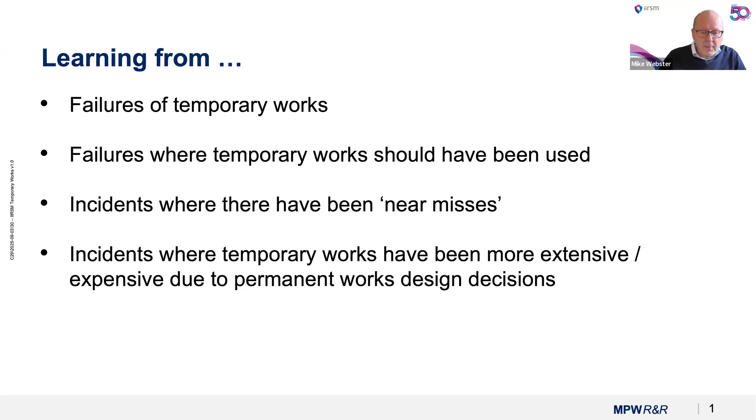One thing to note up front is it's quite difficult to find detailed information in the public domain on these sorts of incidents, so I've had to use information from a range of countries over and above the UK. In cases where I've been involved as an expert, I'm limited to speaking about what details are in the public domain, so the information put up might not be as extensive as we'd like it to be.

Before going into some of the case studies, I thought this was useful to look at - this was from the Bragg report, a report from 50 years ago into falsework collapses that led to BS 5975. One of their conclusions was: each failure has 2 elements - the technical cause which led to the collapse, and the procedural errors which allowed the faults to occur and go untested and uncorrected. You'll see these coming through each of the case studies as we go through them.

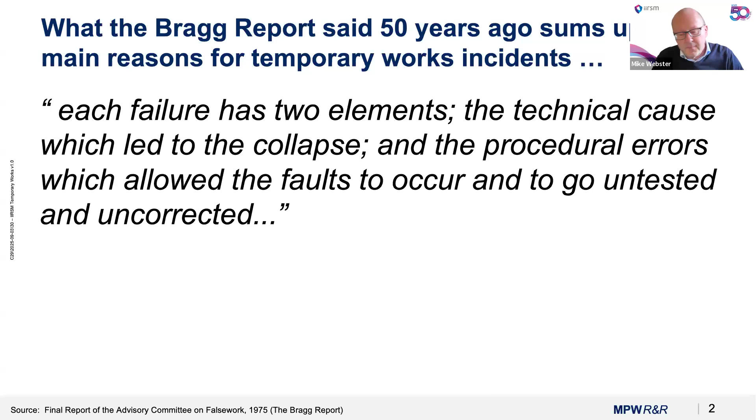I'll talk about 3 case studies of failures of temporary works, and then I'll stop at the end of this section in case there's any questions from yourselves. So the first one was...

A 40-meter high scaffold in Milton Keynes that collapsed in April 2006, leading to injuries to 3 workers. Unfortunately, it wasn't a designed scaffold - it was based on a standard scaffold and erected to a height and width much greater than you'd expect for a standard scaffold, a sort of TG20 type scaffold.

Sorry Mike, can I just interrupt? Sorry Mike, because I'm just not seeing your slides at the moment. Oh, that's not showing - I know we had them open just before we opened. I can see them. Oh, not coming up for me at all. Oh, Joe can see them as well. Brilliant, it is literally just my Zoom playing up. I am ever so sorry everybody else, I'll be quiet again and see what's wrong with my Zoom. Better to think you've got a problem and not have one than to think you haven't and you have. Yes, the wonders of modern technology.

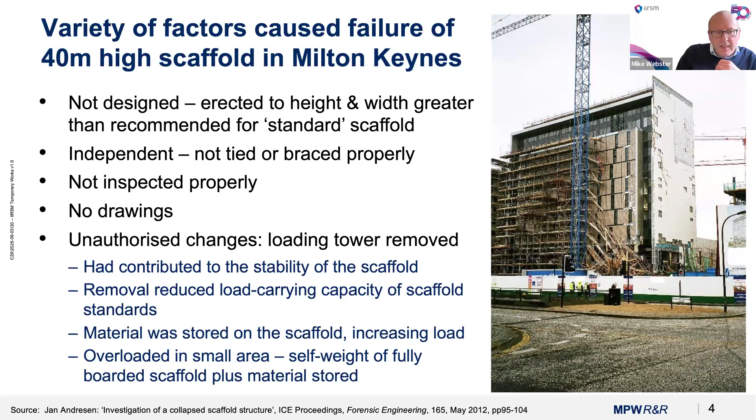So it's a combination of control, unauthorized changes, not following what BS 5975 would require.

The second one to talk about today is a collapse of scaffold supports in a concrete building in Rotterdam in 2010. This was a hybrid precast and in situ concrete construction. The main beams were in situ concrete, but they had precast slabs spanning into them. Before the main in situ beams were completed in place, they had to support temporarily the precast slabs. You can see some of the support to the bottom of the photo on the right here.

What happened during the casting of the floor, the temporary propping structure collapsed, resulting in 5 injuries. The detailed investigation that the Dutch authorities did indicated there was no stability calculations, and the bracing had been omitted in one direction. Although that had been noticed, there was no clarity on responsibility, so it meant that although someone had seen it, they didn't bring it up, they didn't take any action.

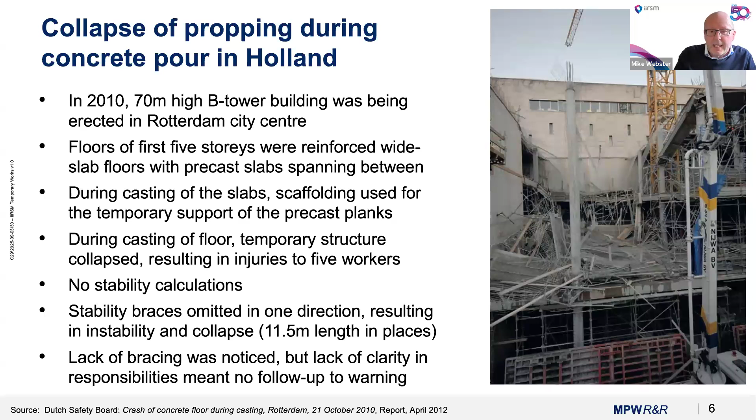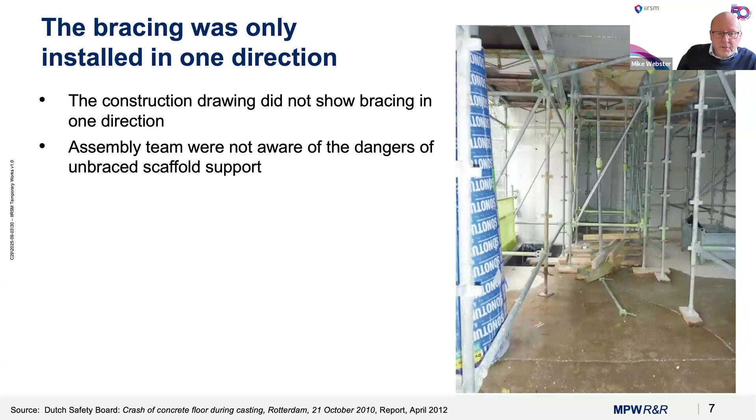There's just a couple of photos that are in the investigation report. You can see here in the longitudinal direction going into the page, there's actually no bracing between the vertical members, whereas you can see some bracing in the lateral direction. From the report, it turns out that the people who assembled it weren't aware of the dangers of unbraced scaffolding. And here you can see that the vertical members were footed outside the slab.

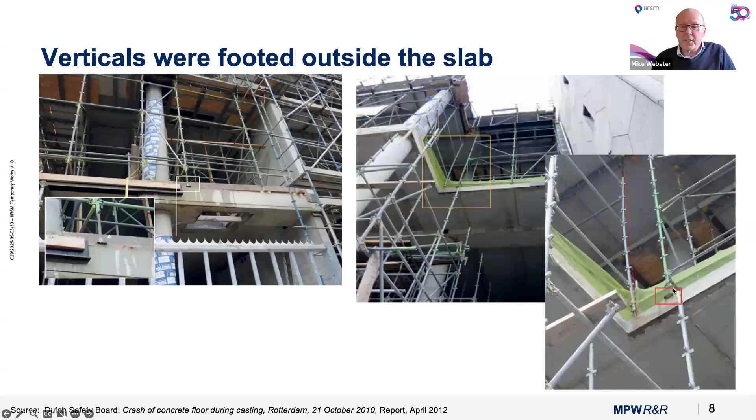This meant an awful lot of the load was taken in the vertical members rather than going through the slab. You can see on the right hand drawing here, bowing of the vertical members under the load. And here we've got an offset junction that would have taken an awful lot of bending and shear stress from the level below that you wouldn't expect a connection like this to have to take.

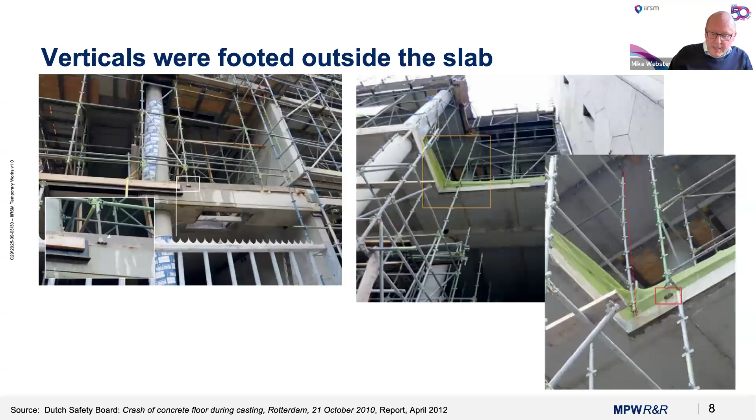So again, a combination of the design left out elements. It wasn't appreciated on site. It was spotted by some on site who didn't flag up the issue.

Again, it was a combination of multiple design and construction errors. I've got a few more slides showing detailed photos of what went wrong, but in summary, the design had used the wrong method for undrained soils in the finite element analysis, which ended up overestimating the soil strength, underestimating the loads, giving an under-designed diaphragm wall.

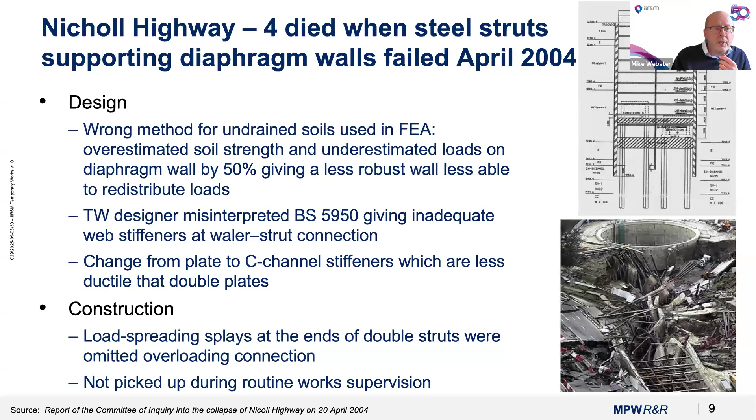The stiffeners were inadequate because the temporary works designer had misinterpreted BS 5950 for steelwork. There'd been some previous buckling of stiffeners, so they changed to a C-channel section, which is less ductile, gives less warning of failure. And then in construction, load spreading splays were left out, and it wasn't picked up during routine supervision inspection. Got a few more details here.

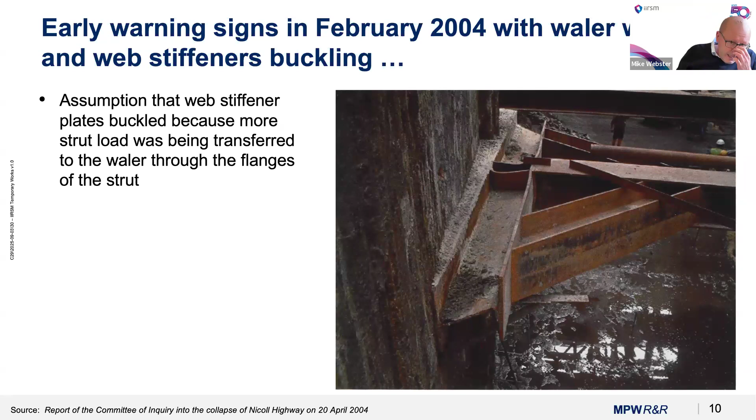This slide shows what was happening 2 months before the collapse. You can see at the end where this member comes in, the longitudinal strut comes into the waler. Because there's a heavy concentration of load there, they've put 2 stiffeners there to stiffen the web. These would seem to be buckling, and the assumption was that more load was being taken into the waler than anticipated.

So the reaction to that was to replace those vertical stiffeners shown in the previous slide with C-shaped channels, shown in yellow on this slide. The trouble is no one had experience of using them as stiffeners. It seemed like a good idea, but they didn't have the experience and didn't appreciate that although the capacity increased marginally, the ductility, that warning of failure, was reduced considerably, because there tends to be more of an element of sway failure whereby the channels would move sideways.

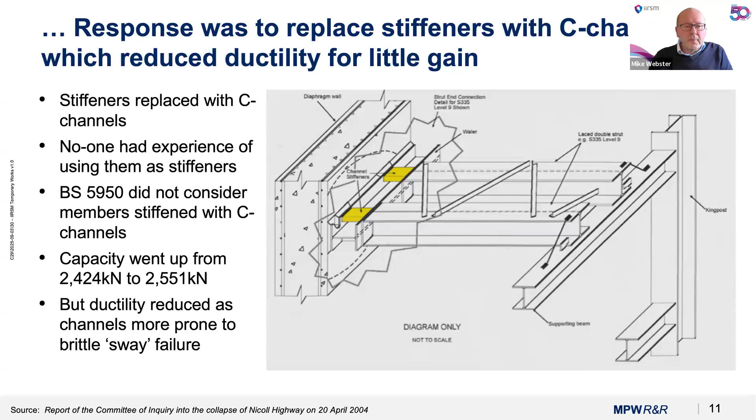And the other problem was the connection of the waler with the C channel, and the designers had got the bearing length wrong and the effective length of the web.

What should happen is if you've got the web taking a lot of load, you want it at an effective length as low as possible so that it's stiffer. And what we should have had is a 65mm assumed width rather than a 400 assumed width.

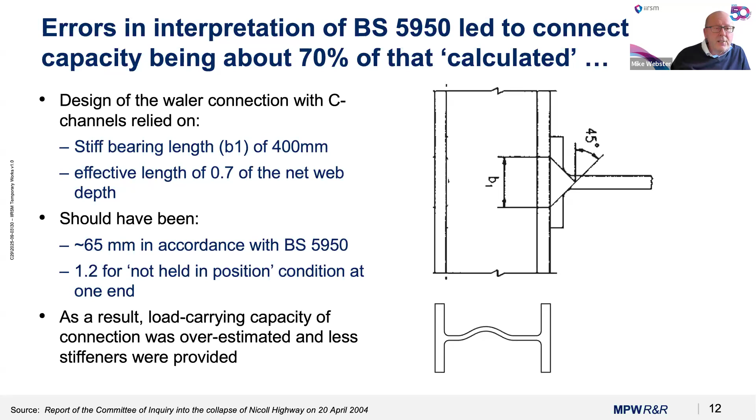And the web shown in the bottom here as sort of curved should have been taken as 1.2 times the length instead of 0.7. And the result of this, for those familiar with steelwork calculation, is that it overestimated the load carrying capacity of the connection, and fewer stiffeners were provided than actually needed.

And then when it came to the site work, not only had we got the design problems here, but there was an intention to put in these splays, the diagonals at 45 degrees shown in the top diagram here. And they would have taken some of the load from these struts, put it into the waler.

Without these splays there, the loads were going straight down the struts here into the C sections here, which you can see have swayed over a bit, and then into the waler. So it meant the connections were carrying 100% of the strut load instead of 2/3.

There was no redundancy anywhere else for the load to go, which meant that when a strut fails, the neighbour is unable to take the load. And because, going back to the first slide, we've got an understrength diaphragm wall, which was unable to distribute the load, then that's when the failure occurred.

So a combination of design and construction issues that weren't properly spotted, either in design checking or in the construction.

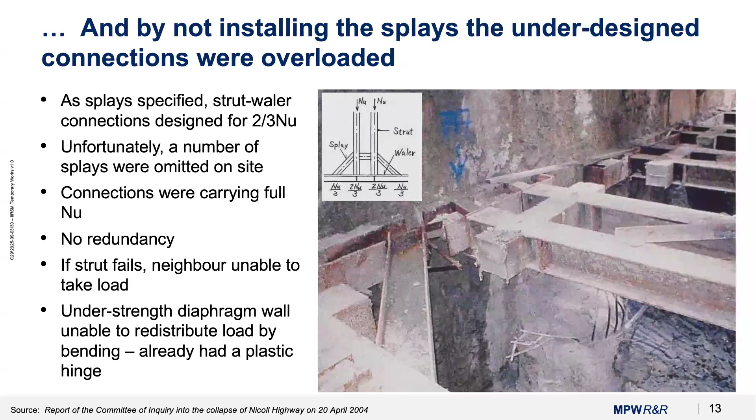So it's all going to come to the fore. I've got to do what's called knowledge, skills, and behaviours for designers. So those are perfect examples that Mike's going through here. Fabulous, thank you very much for that, and a few more to come that hopefully will give you some case studies.

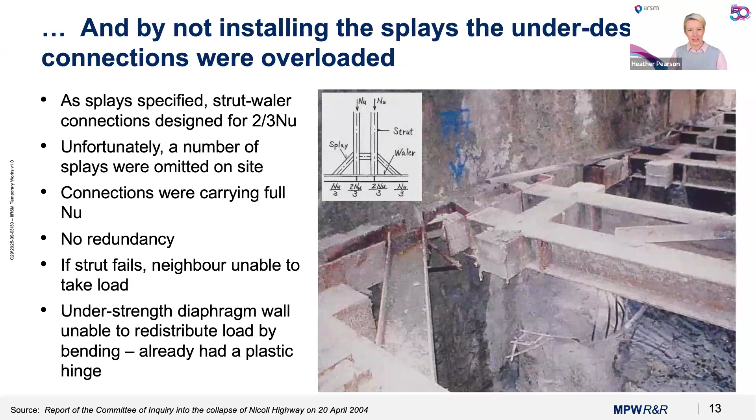Spot on. I've just got one more comment from Ahmed, who says the integrity of the construction drawing engineer and the temporary works coordinator is also quite important. Okay, thank you for that, Ahmed. Okay, I will let you continue. Thank you very much, Mike.

Right, thanks. And this next set of three case studies is something that I perhaps see a bit too frequently - failures where temporary works should have been used. The first one, relatively straightforward.

It's a trench 2.4 meters deep. It should be relatively obvious that we need to support a trench of that depth, because one of the big problems is, yes, soil can stand up on its own when it's excavated, but we don't know whether it's going to stand up for 30 minutes, 30 hours, 30 days or not.

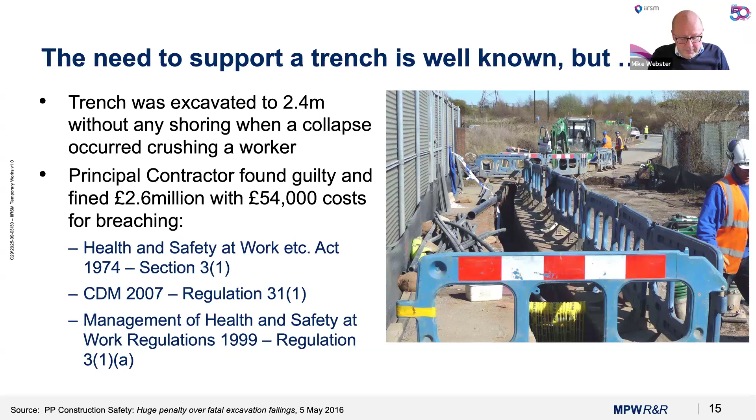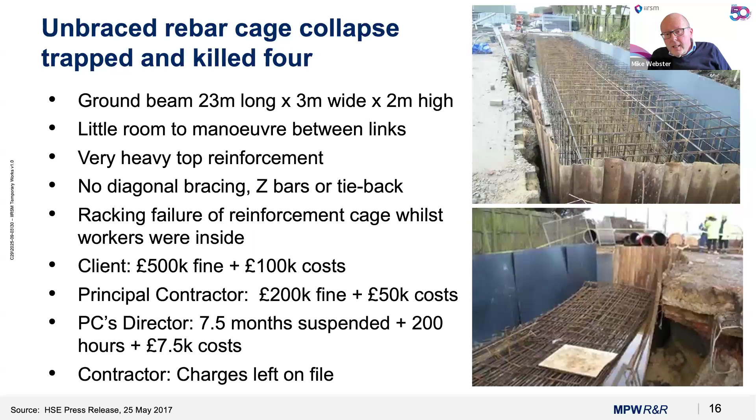Not only was the principal contractor fined 200,000, the client was fined as well. The principal contractor's director had a 7.5 month suspended jail sentence plus community service and costs. For the contractor, the charges were left on file because unfortunately it was their people, a couple of their directors, who had died, so there was no one really to be charged. The only organisation not prosecuted was the designer.

3 frames were left propped against the column overnight. Those 3 frames weighed 655 kilograms overall, and everyone just thought they'd been strapped to a column. Turns out they hadn't, and unfortunately they ended up falling on a passerby, killing her outright.

The contractor was fined for it, the contractor supervisor had a 12 month jail sentence, and the principal contractor site manager got a 6 month suspended sentence. So just as a reminder, even what we might view as a fairly minor temporary condition - make sure things are restrained or strapped properly. It doesn't actually need much force to stop things like these falling, but equally it doesn't need much force to start them falling. So just a reminder about simple situations.

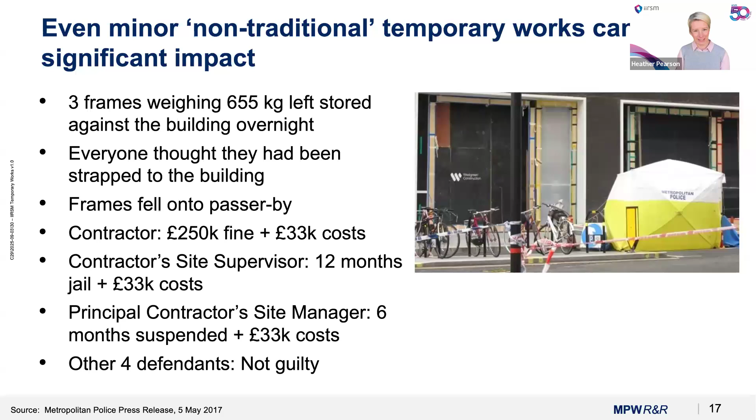We then review them and put comments, and it's put on the CROSS website for people to look at the reports, also sent out in quarterly newsletters. Where it's quite useful is if you've got a particular situation you've not come across before, or you're doing risk assessment or planning - it's often worth clicking on the site, having a look, putting in your keywords, and you'll see other people's near misses and the comments we've put on them. It's quite useful to learn from other people's near misses and get the information into your planning. Equally, if you see something that's a near miss, submit it to CROSS - it's all confidential and will all be anonymised.

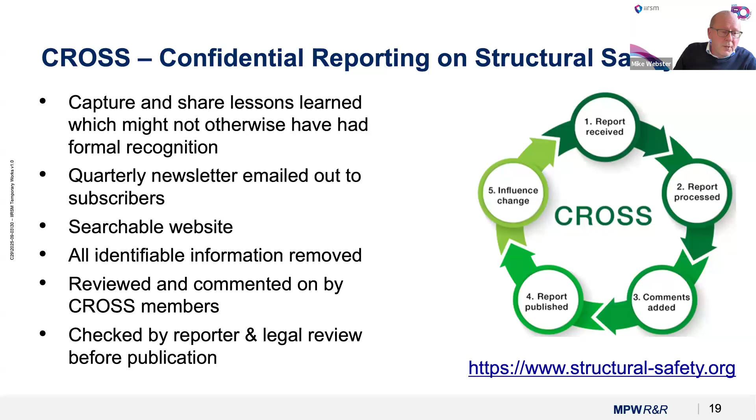So there was always going to be an element of wind tunneling and wind force on that wall. The permanent works designer did identify the need for propping in a risk assessment that they did, but it seems it wasn't set out clearly enough for the contractor to spot, although really the contractor should have questioned it, given a wall of that height with the potential for wind.

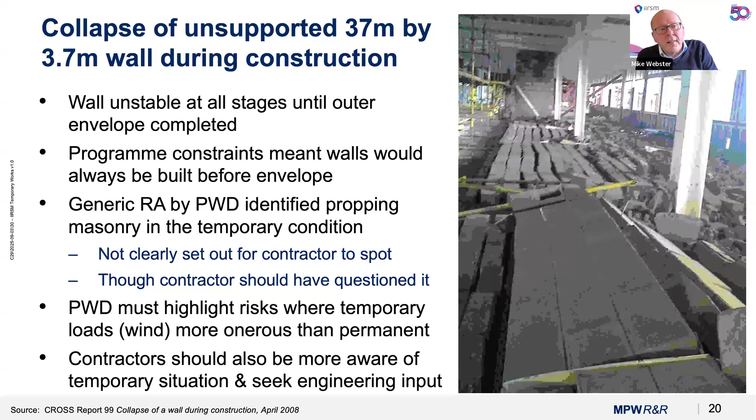But it highlights a couple of points that tie in with BS 5975. The permanent works designer needs to highlight risks where temporary loads are going to be more onerous than permanent ones - in this case, the temporary wind load when the wall is exposed. And contractors should also be a bit more aware of the temporary situation and just seek engineering input, or ask the designer if they've got concerns.

But in the intermediate stage, you need to give some thought as to how those forces can be resisted. With this, because it was largely a steel structure, but the second floor was post-tensioned in order to give longer spans, the contractor decided to erect the steel first, with the post-tensioned second floor being done later.

The steelworks subcontractor appreciated the issues here and put in temporary bracing to the kinked columns. The main contractor then, for some reason, removed that bracing, presumably in their way, and was a bit surprised when told the bracing was still required and it needed to be put in to stop any potential temporary instability.

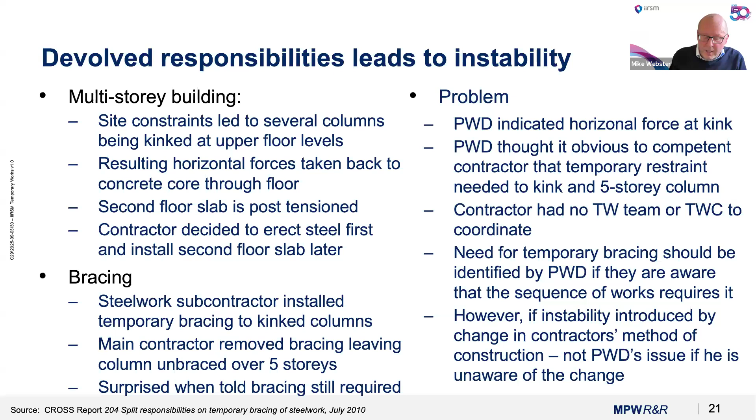But again, if people are not familiar with it, there's just the temptation to think we just need to take the loads off the walls.

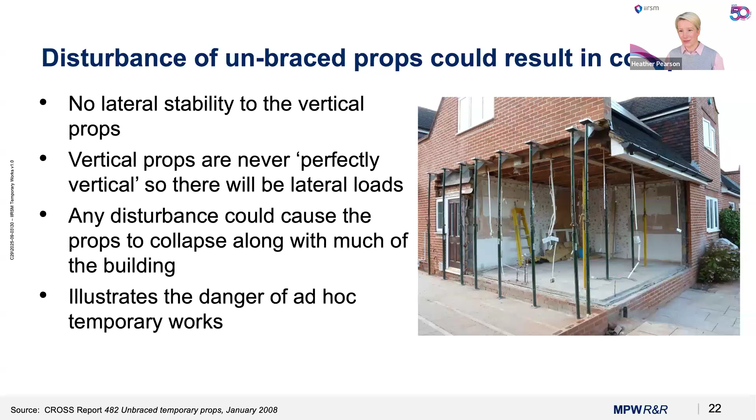That's quite interesting, putting that cost element in there as well, that 40%. Okay, I don't have any more questions coming through in the chat at this moment, so I'll hand back over to yourself.

The final category is incidents where temporary works have been more extensive or expensive due to permanent works designers, which follows on neatly from Heather's question. The first one is a fairly impressive scaffolding structure, a standalone, independent one. But the reason it's standalone is because no ties were permitted in the building due to the render used, the difficulties of patching, and no opportunities for through ties as there weren't windows. So we've got this fully buttressed, freestanding scaffold.

One of the things I always point out is that the time taken to erect scaffolding actually exposes a lot of the scaffolders to risk of falls in particular. This took 4 operatives 7 days to erect, and presumably something similar to take down. I'm not sure how much it cost, but it feels a bit unnecessary, purely because decisions taken in the permanent works design meant the scaffold couldn't be tied into the building, so we needed this buttressed freestanding scaffold.

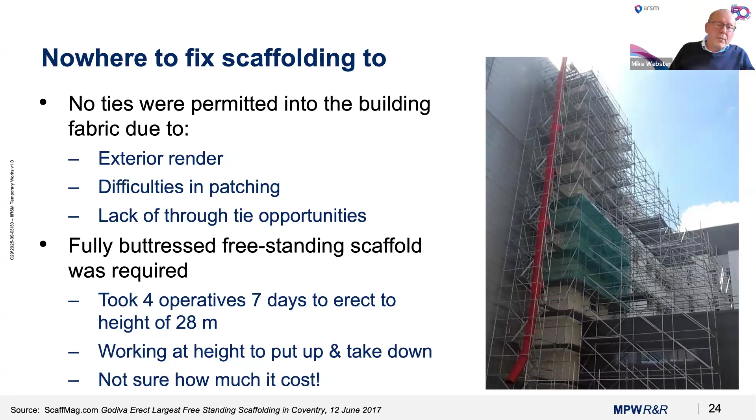Another one to be wary of is integral bridges. They're a good idea because they get rid of bearings and movement joints at piers where the bridge is all built. But a bit like the Dutch structure I showed earlier, what you've got is precast beams spanning between in situ concrete diaphragms at the two ends, with the precast beams spanning in between.

So the precast beams need to be supported until the concrete in the diaphragms at either end has reached sufficient strength, and effectively any temporary works would need to take the weight of the bridge beams. One key thing here is that because the foundations stretch out far enough, you've actually got a decent foundation to put the temporary supports in. You can see behind here the props holding the precast beams in place, taking the load down into the reinforced concrete foundations underneath.

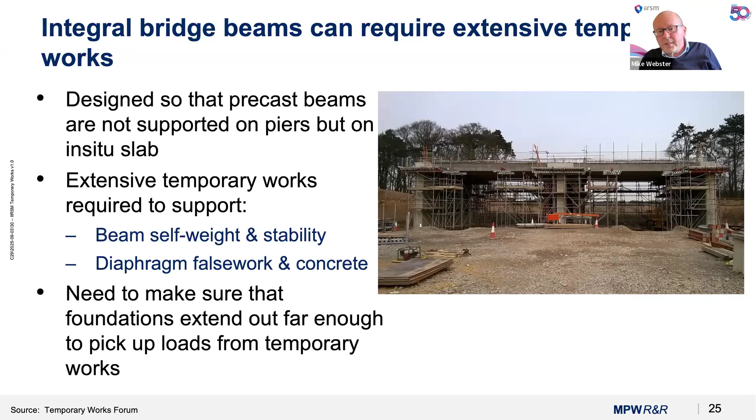If those foundations hadn't extended out a reasonable distance, you would have ended up with almost temporary foundations for the temporary works. So it's just a simple thought in the permanent works design - think about how it's going to be built. Yes, it might take a bit more concrete with slightly larger foundations, but it will save a huge amount of temporary works on site and make it safer to build.

The final example is an office block structure, where a crawler crane had to be used on the ground floor slab in order to install fairly hefty structural steelwork. Unfortunately, the permanent works designers hadn't considered the construction load case in their design - they only looked at the permanent cases. Of course, having a crawler crane tracking on the ground floor slab is a far more substantial load than any of the permanent loads.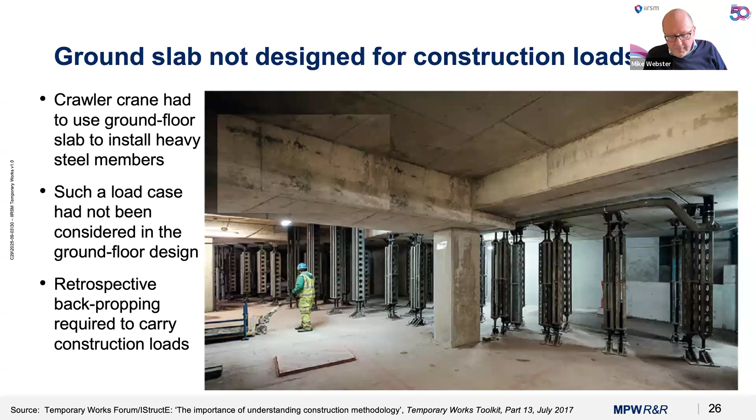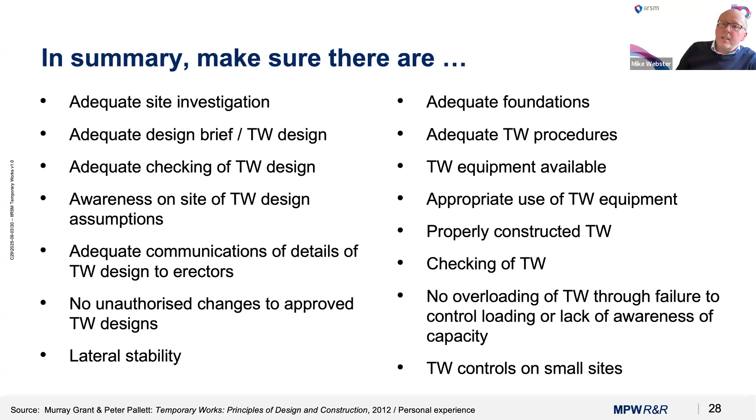One of the most important points is the one at the end about temporary work controls on small sites. We tend to think of temporary works as a full BS 5975 implementation with procedures and temporary works coordinators, supervisors, designers. But actually, HSE has produced what's called a sector information minute on its website that suggests for smaller sites there is a more proportional solution. It doesn't necessarily expect the full-blown BS 5975 implementation, but you need to follow the principles of having a checked design, having hold points in there, having checks.

And then just to end on a positive note, tying in with one of the questions that came up early on about BS 5975, some thoughts from fairly senior people in the temporary works industry: the impact of BS 5975, influenced as it was by the Bragg report, has been profound. Since its adoption by the industry, there's been no falsework or excavation failures in the UK on the scale of the failures of the early 1960s and 70s.

And tying in with what I've been saying on the way through, the controls, if complied with, reduce the risk of failure to an acceptably low level, but non-compliance, part or whole, significantly increases the risk of failure. And we've seen that through the case studies presented.

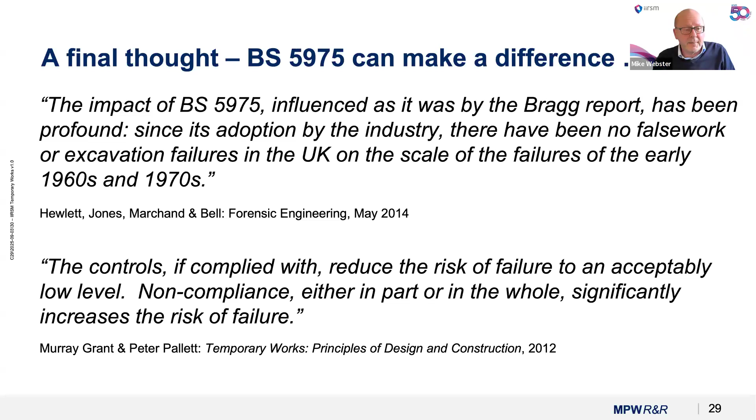Right, just any questions now? That's the end of the formal presentation.